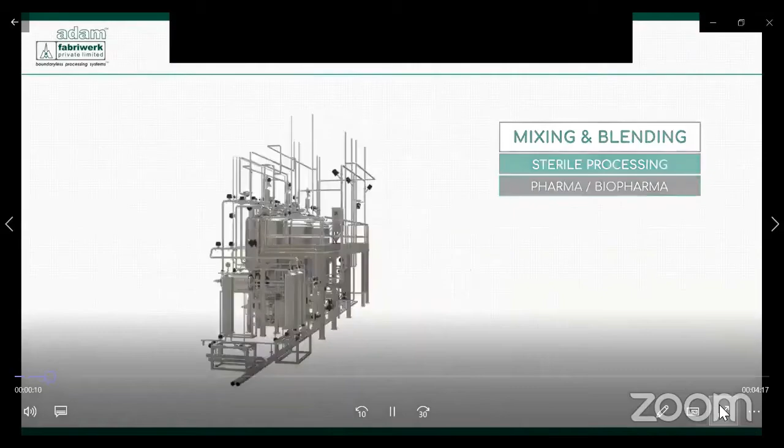I will pause as we go. The process skids are made from 5 liters to 30,000 liters. These are made to the ASME BPE standard. They are completely compliant to the GAMP5 and the 21 CFR Part 11 compliant system.

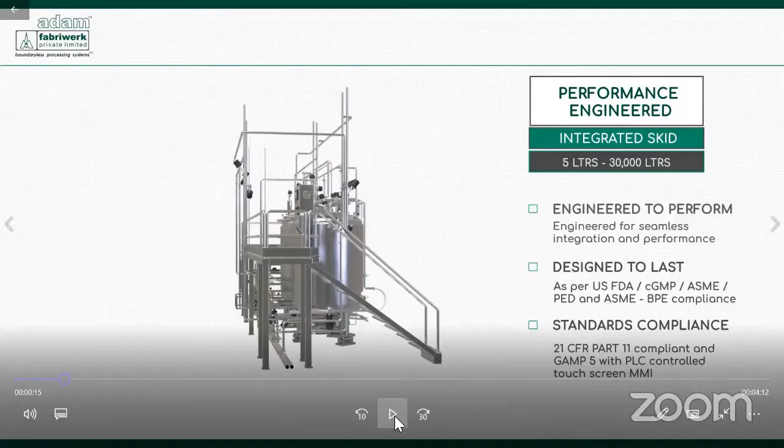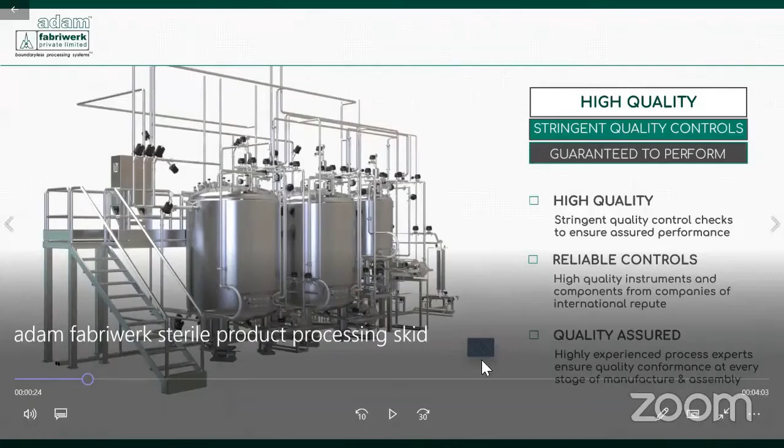The vessels that you are about to see here, these are 5,000 liter vessels, and the vessel here on the right is 1,000 liters. Now, why integrated skid? Because this is assembled as a complete module and built ready to be used at the customer's site. So what do you get in this system? There is high quality, reliable controls, and assurance of specific quality levels with the instruments used.

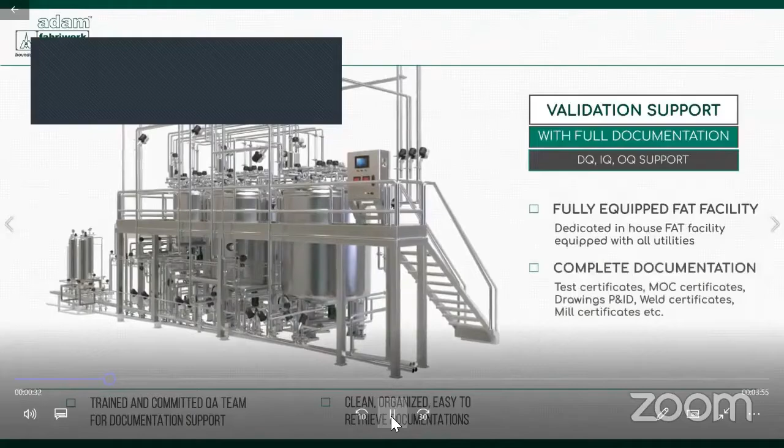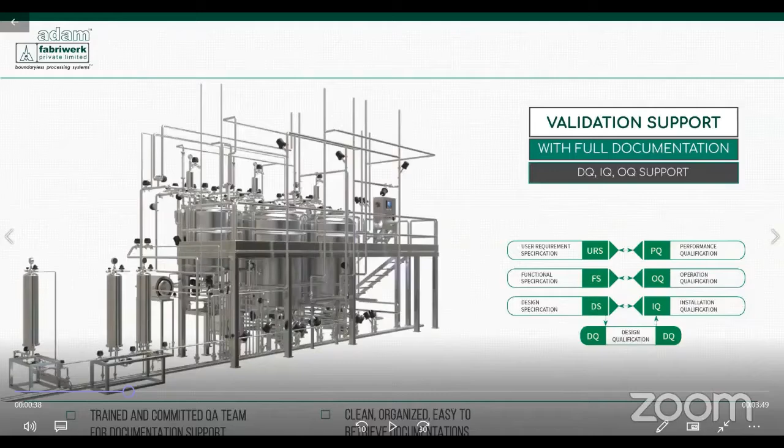From the user requirement specifications, we make it with respect to the functional specifications. The design specifications are built in. The DQ is done. The skid is manufactured. The IQ and the OQ protocols are performed. So right from the functional specifications till the OQ, we have qualification documentation with complete support. There is a trained and a committed QA team which achieves these functions, and there is an easy retrieval system for documentation.

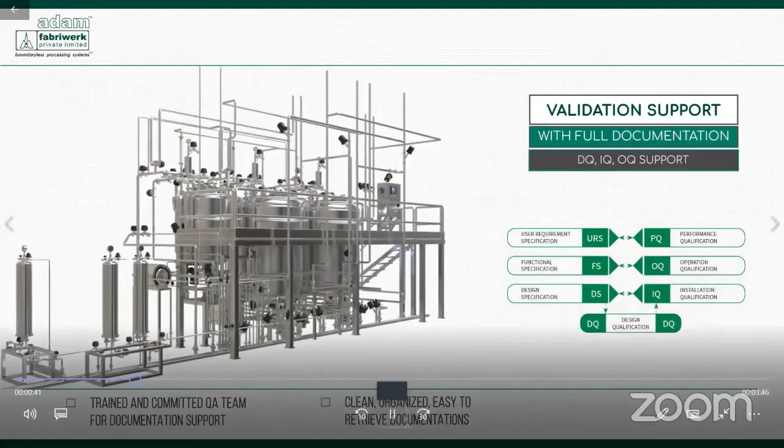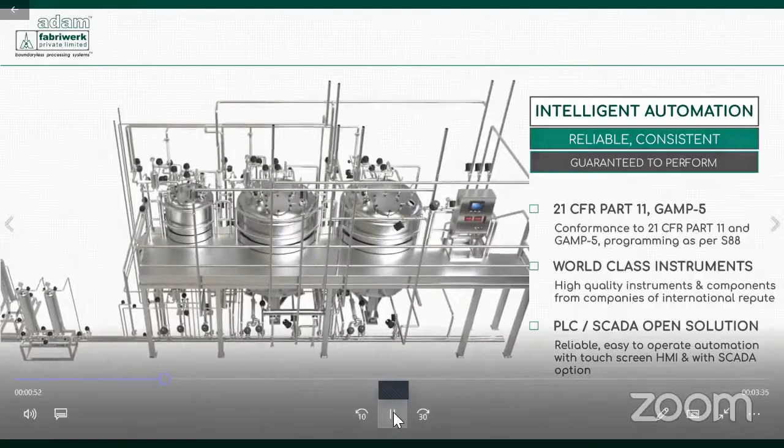The heart of today's systems is no longer the stainless steel and the other instruments, but we feel the heart of the system today is automation. Because through automation, the various steps and the processes of the skid are made possible, and they move together with an easy way to integrate within the system. The way to virtualization.

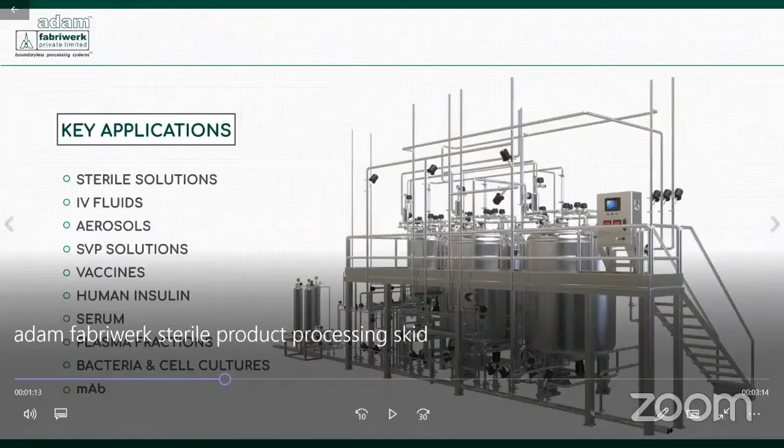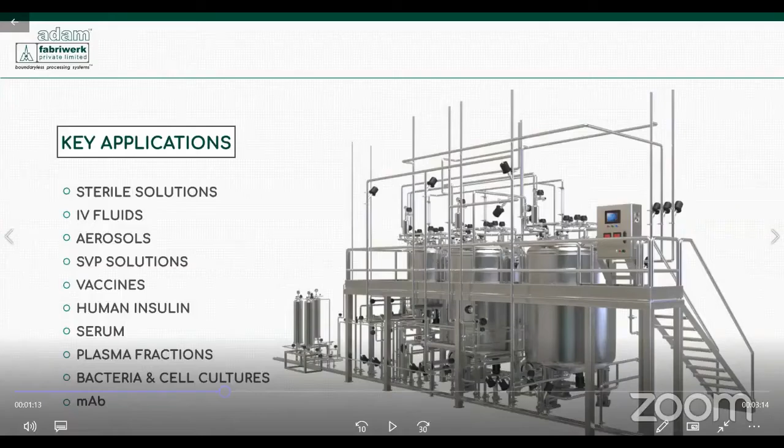These are the key applications for the processing skids in terms of IV fluids, aerosol products, small volume parenterals, vaccines, human insulin, serum, plasma fractions, bacteria cell cultures, and monoclonal antibodies. With COVID-19, we have seen expanded use of these process skids and modular skids for today's new vaccine remedies, where blending is required at a short notice and fast skid manufacturing has become the norm.

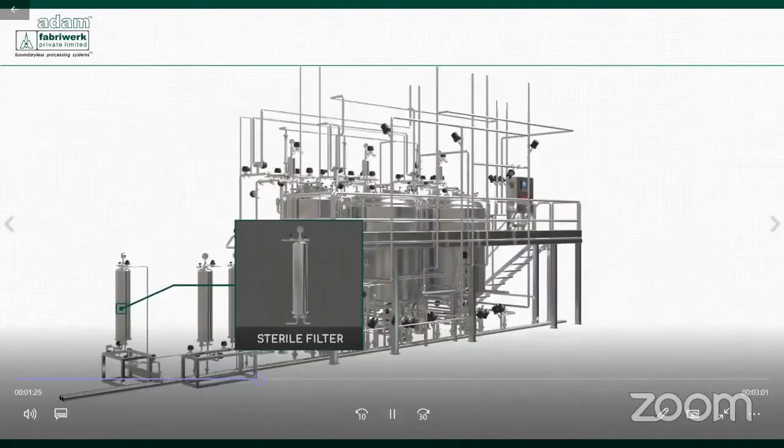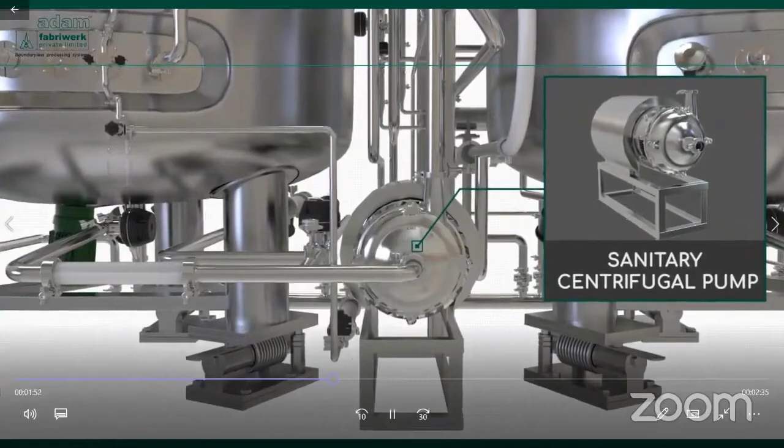There are different instruments and modules within the system, like the filters, the temperature sensor, the steam traps, the sanitary heat exchangers, the control panel, the vent filters, the load cell. A sanitary centrifugal pump also serves for transfer as well as for CIP. Pressure relief valves within the system take care of any overpressure. Pressure transmitters inform the pressure details. Sanitary diaphragm valves within the system transfer the fluid.

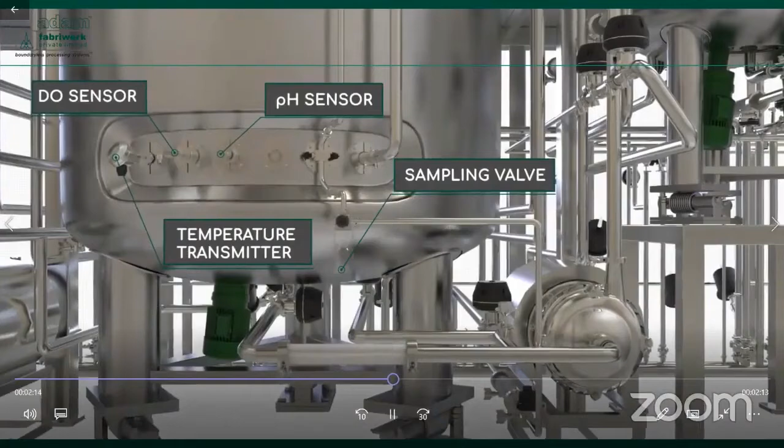There are various sensors, pH, DO, temperature. There are options within the vessel for mixing. So there are blending mixers like the GMP mixers, which blend liquid to liquid products. There are also high shear mixers and upstream mixers which blend the powders into the liquids. So during compounding, the high shear or the upstream mixers are used, and during filtration, the GMP mixers are used for low shear blending.

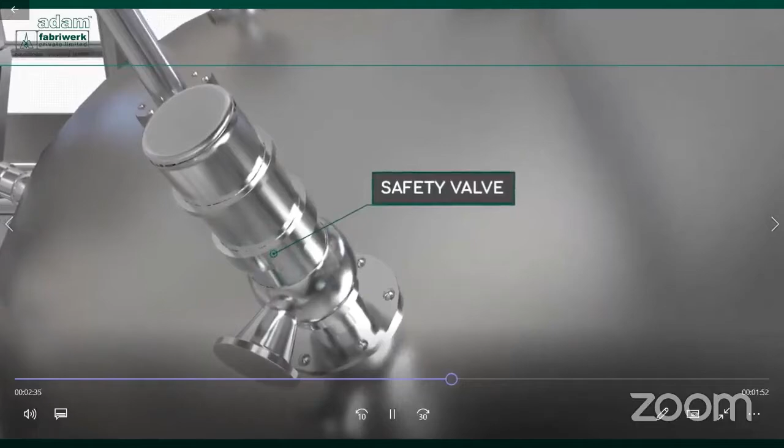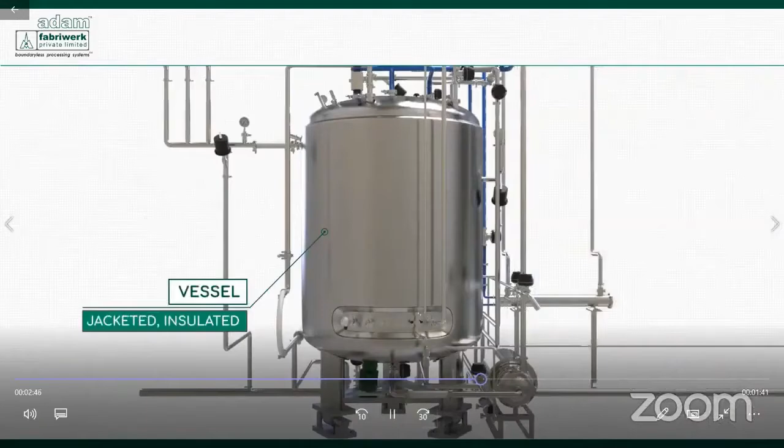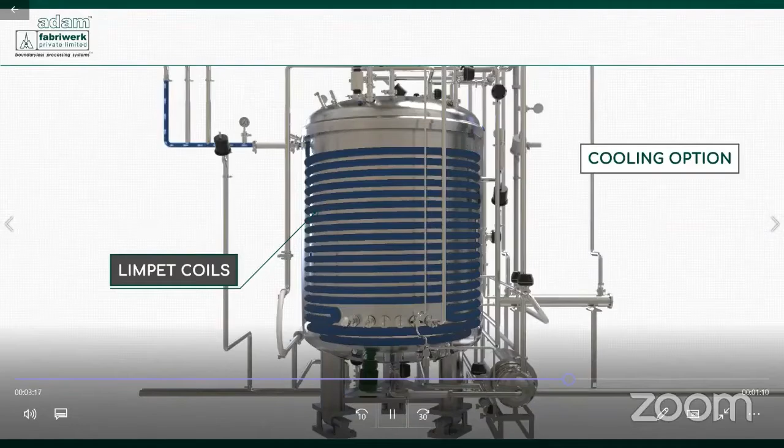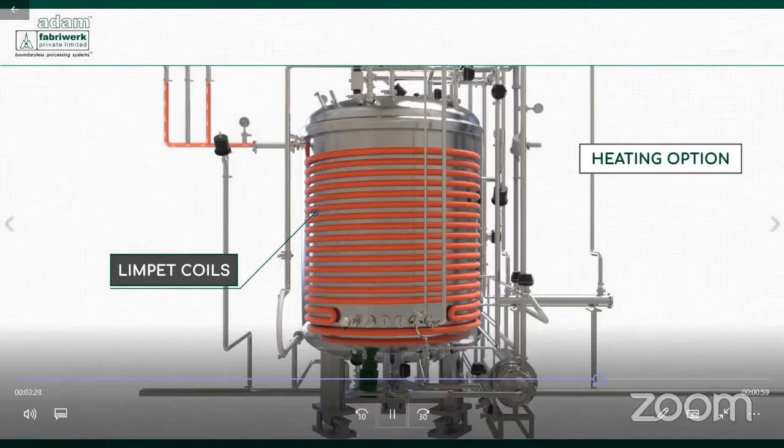We will go into the process. Typically, to start off with, the vessels are jacketed, insulated and cladded. The vessel has a dynamic spray ball within the system through which the WFI fills in, and the temperature is controlled through cooling water or by steam. These are the coils through which water can be circulated for cooling the product. To get the temperature down, 2 to 8 degrees can also be supported through this, and there is a steaming option or heating option for heating. These are the mixers in operation with powders coming into place.

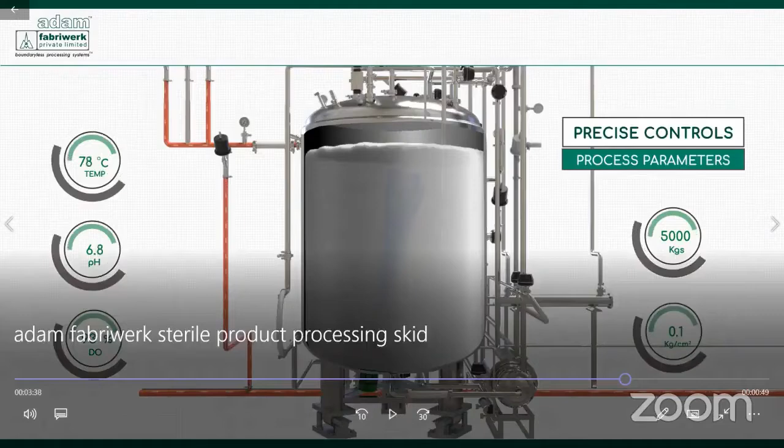The most important part of the automation system is to control the process parameters of temperature, pH, dissolved oxygen, load cell, and the pressure. Now these parameters are controlled within the process vessel. It is possible to set the recipe to desired process controls which are activated within the system through the automation. So if dissolved oxygen levels have to be measured precisely, nitrogen sparging is done within the product and the dissolved oxygen levels are monitored. These are done for typically oxygen sensitive products.

The pH of the solutions is used for changing and monitoring the buffer solutions which are added. The weight of the system is monitored by addition of different drugs, APIs, slurries, and process skids part.

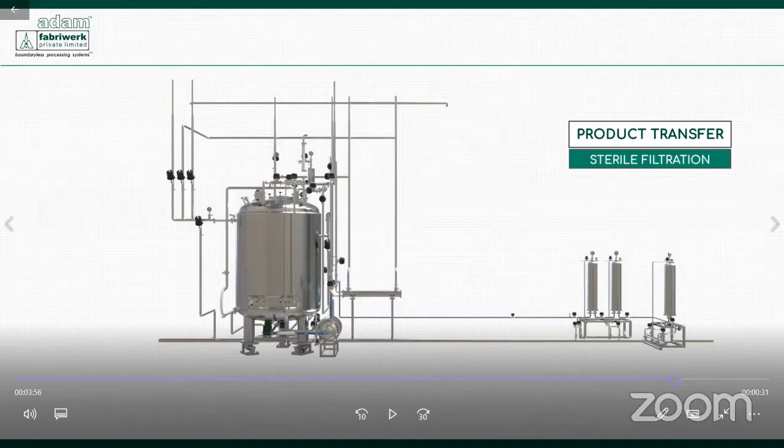The most important part in sterile injectables today not only is the mixing and the blending, but also the monitoring, precise monitoring of solutions through specific instruments of pH, dissolved oxygen, temperature, load cell, mixing parameters, etc. It is very important that the process cycle is followed by the CIP cycle and the SIP cycle and the drying in place DIP cycle. This ensures the complete operation of the system for aseptic transfer and also gives way for manufacturing of complex injectable products or critical products to be done within the process skid.

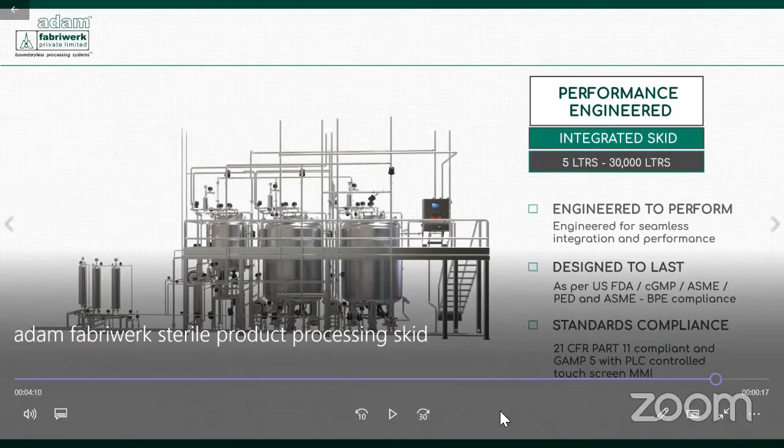The entire skid is built with automation compliant to CFR regulation or EU norms. Most of these systems today are manufactured keeping in view the local domestic markets and the regulated markets. We also keep in mind seamless integration and performance for this system. Operation can be through HMI or IPC, and the SCADA or the supervisory control and data acquisition controls the system for a seamless connectivity to the client OPC server if required.

So the entire integrated process skid system serves as a modular manufacturing system in today's fast-paced drug manufacturing scenario, especially in terms of blending, manufacturing of new injectable products and biologics products, keeping in view the stringency and first to market requirements to be fulfilled.

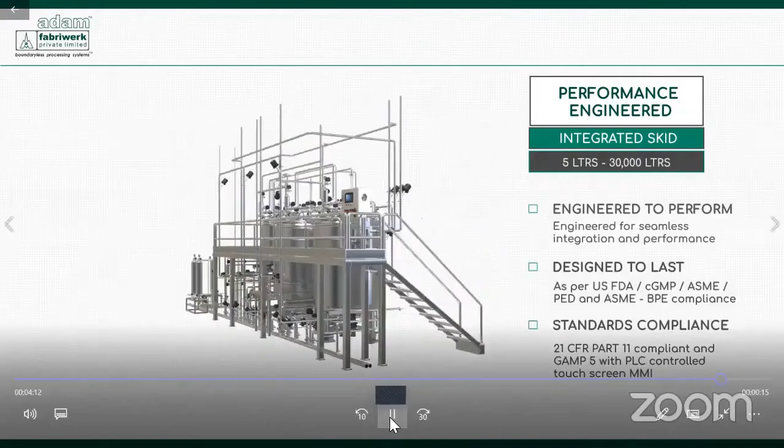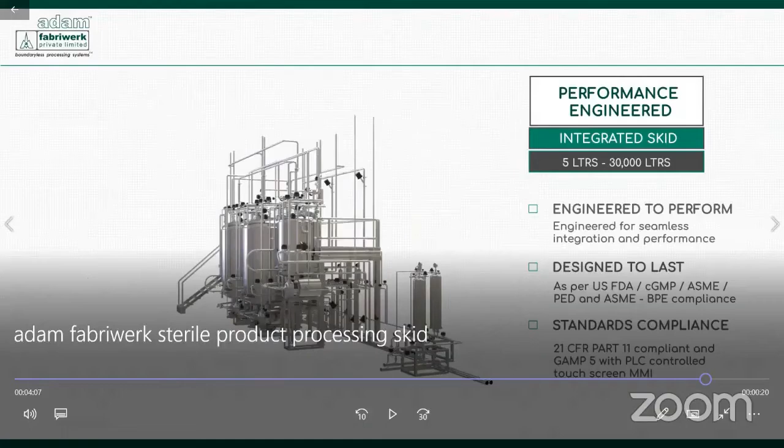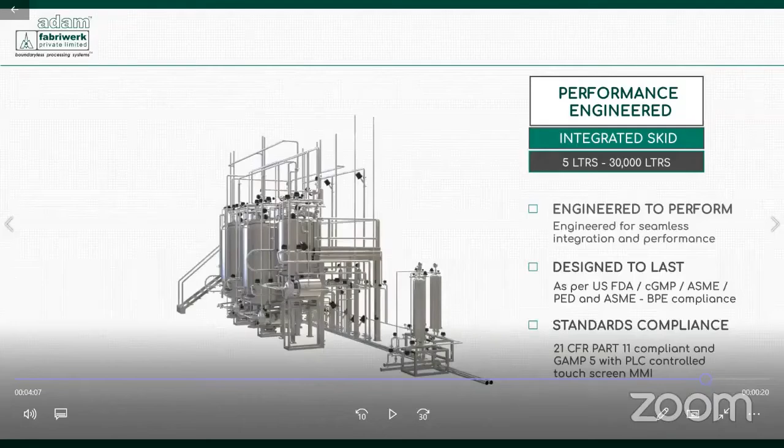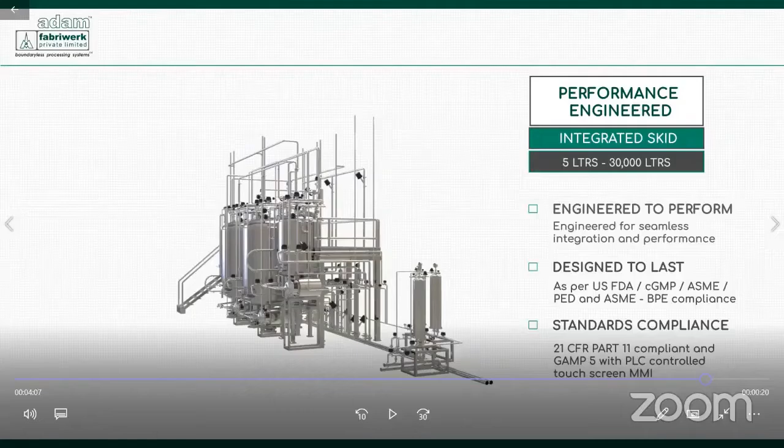Volumes are from 5 liters to 30,000 liters. So there are process opportunities to be manufactured from research and development size of 5 liters going up to pilot scale, campaign scale, and then to production scale. Injectable manufacturing typically remains within an average range of 1,000 liters or so, but we have started seeing larger batch sizes for process optimization, and it is also ensured that these large volumes take into account safe manufacturing of drugs and injectables on a larger scale, keeping in view the faster product requirements of reaching market of critical life-saving drugs.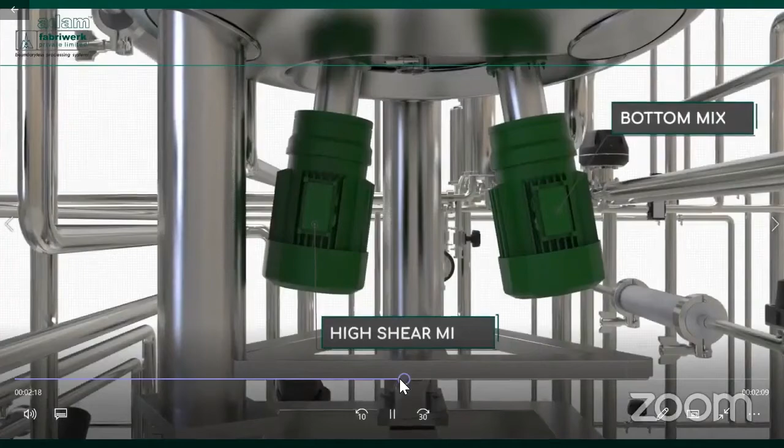There are different options within the process system which enable the use of sanitary valves as well as sanitary block valves to increase the yield of the product and also to ensure a compact size of the skid.

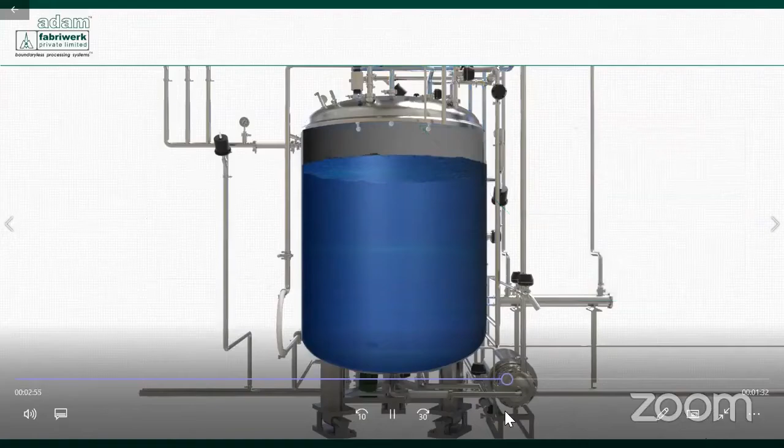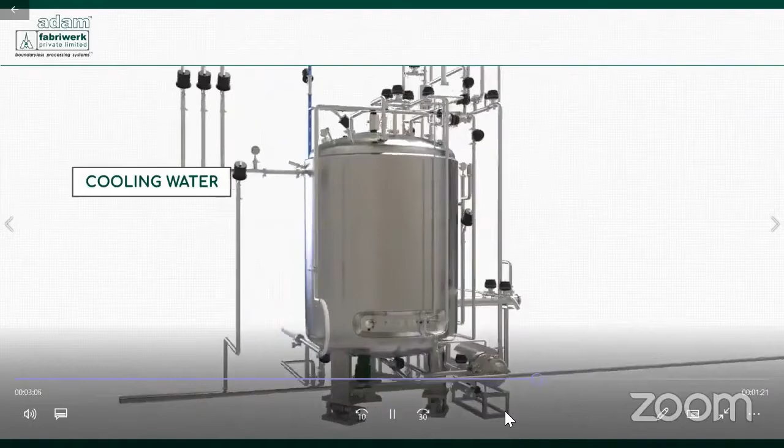The cutouts on the vessel that you see here also take care of process instruments, sampling valves, lines for sparging nitrogen within the vessel, and it also ensures ease of access within the process parameters for the process vessel. Options available today for level measurement are load cell and also radar.

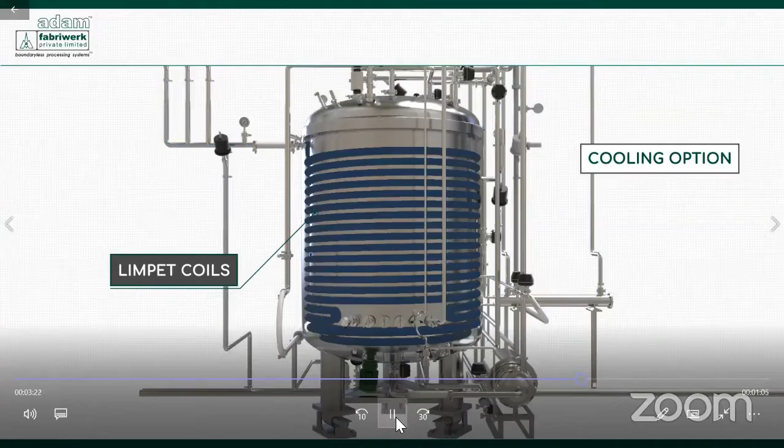Powders can be mixed thoroughly within the vortex created by the magnetic mixer. It also helps for faster dissolution of the APIs or any fluffy APIs as long as the correct mixer design is used for dissolution of these powders.